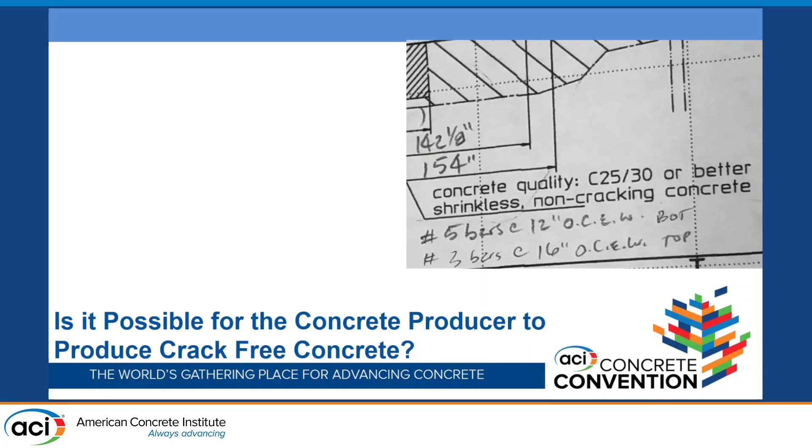So, is a concrete producer responsible for cracking? Is it possible to produce concrete without cracking?

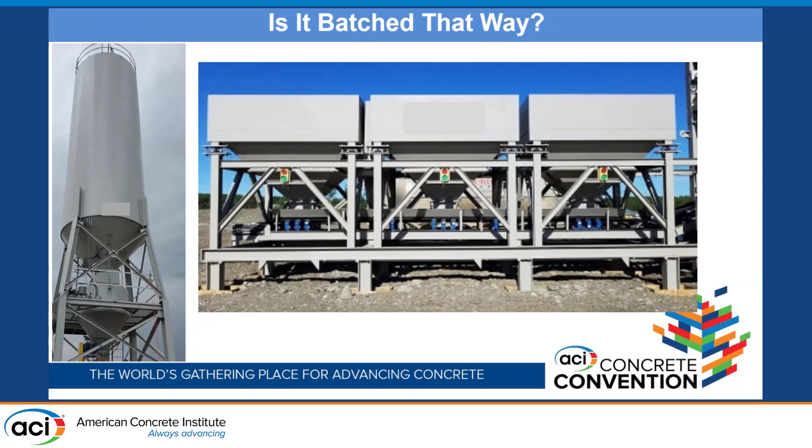So here's a ready-mix plant. We've all seen these before, right? In these plants, we usually label the bins. So we've got 57 limestone, natural sand, and of course the crack bin. And then over here we've got our cement and cracks in that silo.

So do you think we actually put cracks in the concrete before it leaves the plant? No. Do we have the potential of making concrete that can crack at the plant? Sure.

So if we put in more sand to help it pump, how is that going to affect the concrete? Water demand, increased paste, all those kinds of things. If we put in more rock to help reduce cracking, what's going to happen? It's not going to pump, it's not going to finish well, all those kinds of things. So we have to find that balance. Same thing with the cement. If you put too much in, it's going to crack. Not enough, it's going to crack.

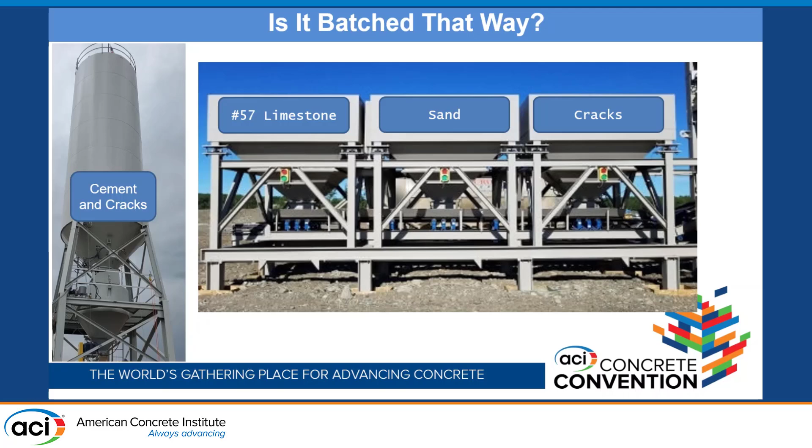So in a broad perspective, cracks form in concrete due to one or more of the following: stress, not controlled by me; subgrade issues, not controlled by me; weather conditions, not controlled by me.

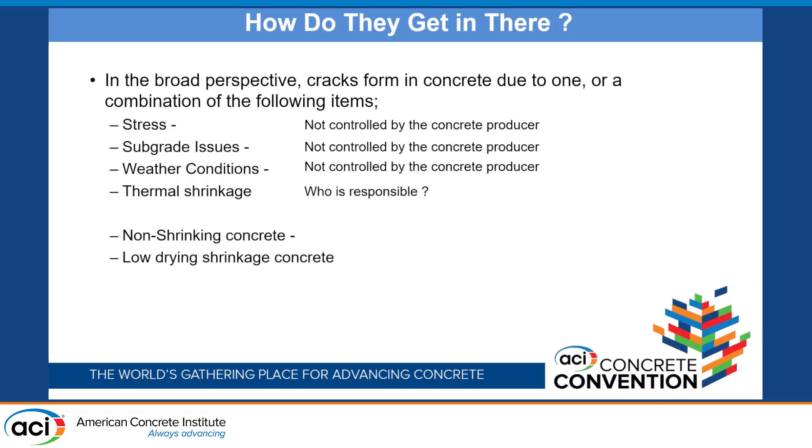Thermal cracking - I was in ACI 207 this morning, I'm a member of Mass Concrete, and I don't want to talk about thermal cracking ever again, but it's part of the committee meeting up there. We just talked about it in 301 not long ago. So we're not going to get into thermal today.

So non-shrink concrete is really not possible with normal Portland cement. Now we can get into Type K and that kind of stuff, that's a whole other discussion. But for ordinary Portland cement concrete, you're not going to produce crack-free, non-shrink concrete.

Can we produce low drying shrinkage? Sure. But how low is low enough? You give me some shrinkage number - is that going to guarantee that you're not going to have cracking? What is that magic number?

And are all cracks caused by shrinkage? Pretty much no, right?

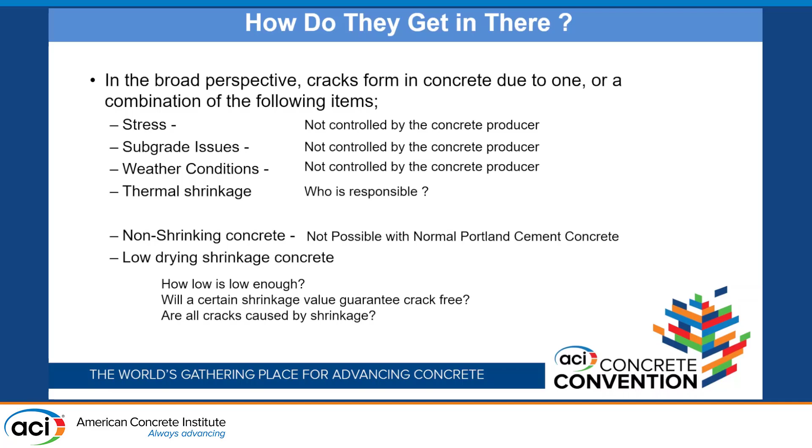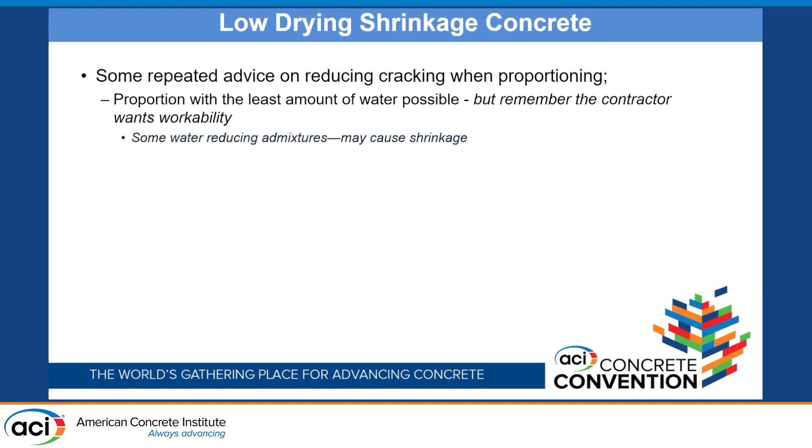So some repeated advice you'll always see, whether it's in Design and Control of Concrete Mixtures or any other references out there: proportion with the least amount of water possible. But remember, the contractor wants workability, right? So you can add high-range water reducers, all that kind of stuff. But some water reducers actually cause shrinkage, and we'll get into that later if you want. Go bug your admix supplier if you want to dig into that.

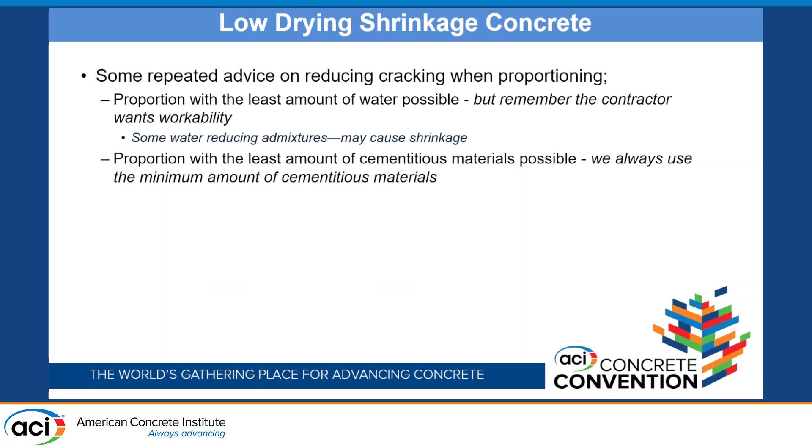Proportion the mix with the least amount of cementitious material possible. Now, being a good ready-mix producer, I'm not going to put any more cement in there than I have to - what's the point of that? So I want to make sure I'm going to get the right amount of strength guaranteed to my customer without over-cementing it.

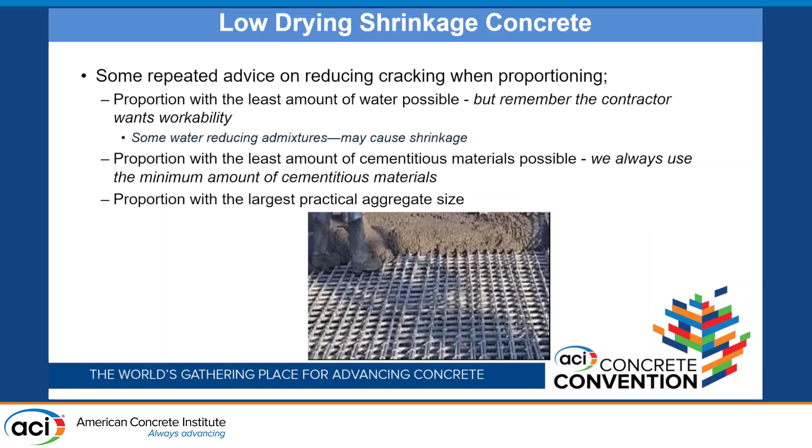So who's responsible to determine the proportions of the concrete mixture?

We can produce low shrinkage concrete if you have enough money. Pay me enough, I'll give you a good mix, but it's going to cost you. Shrinkage is affected by available concrete mixtures and ingredients, so there are rocks that shrink more than others, and more sand can contribute to that too.

If you bring in materials from farther away, it runs up costs. Most projects don't have the budget to bring in concrete mixture ingredients from out of the area. I'm not going to rail in granite from South Dakota to Texas unless you're willing to pay for it. That's a whole different story.

Shrinkage additives may reduce drying shrinkage, but they're not cheap and may cause other issues. One is that whenever you use a lot of shrinkage reducing products, you'll lose strength. So what do you do to combat that? Put more cement in. But then what happens? It shrinks more. So you're in this circular pattern of problems—something to remember when dealing with that.

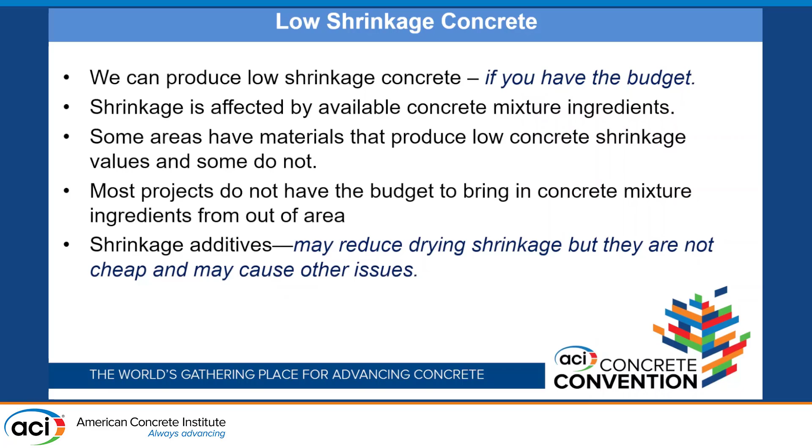This happens to be from one of the projects I'm working on right now. It says maximum cement contents are determined from the maximum water cement ratios. The maximum water contents given in the concrete property tables are intended to minimize drying shrinkage and heat of hydration. So if I design a mix that meets all these criteria, is it going to minimize cracking? Are you going to guarantee low shrinkage just because I produced it that way?

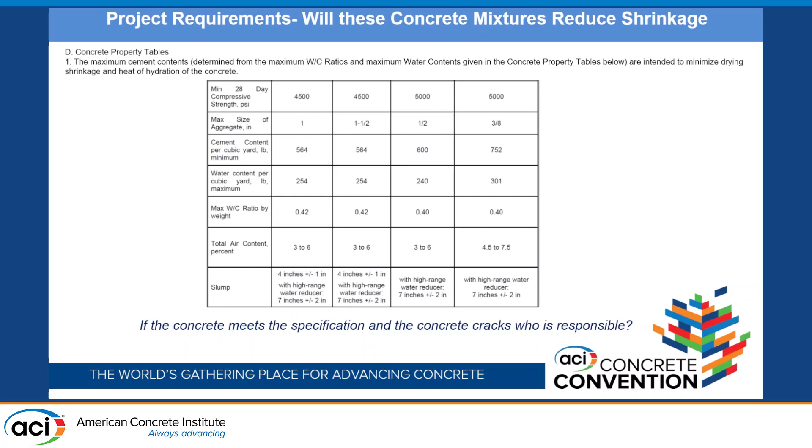So if I do it and it still cracks, who's responsible—me or the engineer? Good question, right?

Well, this is another part of the spec. Maximum concrete shrinkage for specimens cast in the laboratory from the batch will be measured at 21 and 28 days at 0.036 and 0.042 respectively. But also, maximum concrete shrinkage for specimens cast in the field shall not exceed the trial batch maximum drying shrinkage by more than 25%. That means I cannot have more than 0.05 in the field.

So how do you read it? Is that how everybody's reading it? ASTM C157, the shrinkage spec, says field cast specimens can show up to twice as much drying shrinkage as laboratory cast specimens. So if I have to keep it below 0.05 in the field, what does my lab concrete have to be? 0.025, right?

So then I'm getting more and more things that are costing more and more money. You get somebody giving you concrete that may or may not shrink still, may or may not crack still.

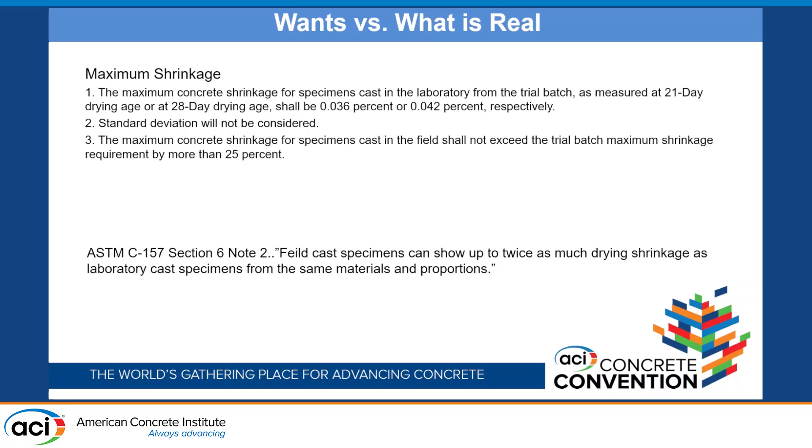So what is real? This is a particular set of materials that I have in Texas. I ran different water cement ratios versus shrinkage, and just as everyone suspects, the more paste that you have in it, the more shrinkage you're going to have. That's not a shock to anybody.

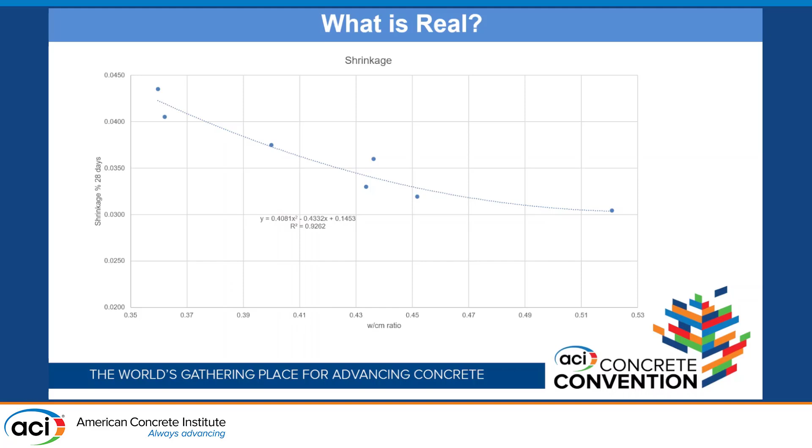So we want to find ways that we can reduce the amount of shrinkage but have enough cement content in the mix to make strength. It's one of those competing factors against each other.

So here's another one: it says concrete shrinkage limit shall be as follows. All concrete designated as low shrinkage shall utilize concrete with shrinkage of less than 0.02% at 28 days. Over here, what I just showed you is that probably the lowest I can get down to is about 0.03. So if somebody says they want 0.02, is that going to happen? Not to say it's impossible, but it's difficult with these materials without adding a bunch of extra cost.

So all the concrete used for suspended slabs utilizes concrete with 0.035 at 28 days. We can do that, depending on how much strength that you need.

Now, if you're worried about these slabs, that it's going to be on a suspended slab that you're going to strip early, what's going to happen? You're going to put more cement in there to strip early. So are you going to make the 0.035 then? Maybe not. So what's more important to you at that point?

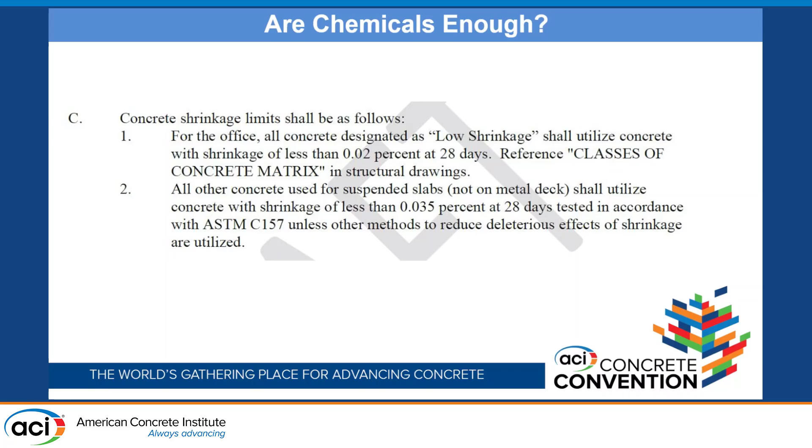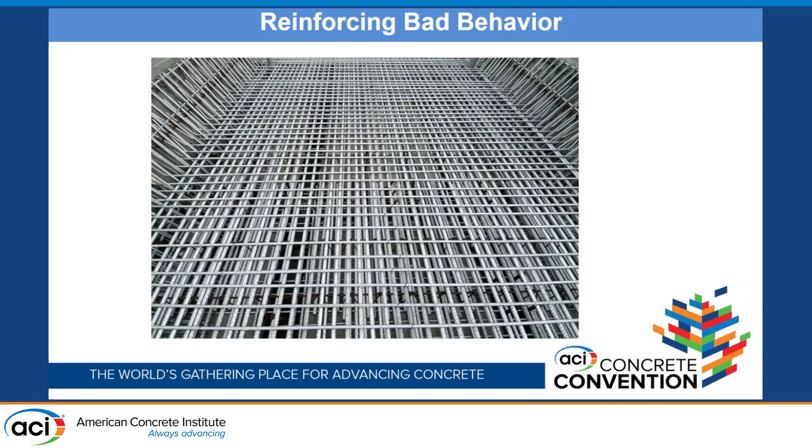So what happens on the job? My truck goes to the job. That's my PowerPoint skills, everybody.

This is an automated slump control system that we have in our trucks. You can tell as he leaves the yard—I don't know where the laser is on this, but anyway, you can tell that he's right at slump when he leaves the yard.

He shows up on the job site. Guess what? A bunch of water's added on the job site. So what do you think is going to happen to that concrete, especially since it was supposed to be a 6 and they poured out a 9? What do you think is going to happen to that concrete?

It's going to crack. I guarantee you it will crack. We know this, yet we do it all the time, right? So you've got to decide what's more important at the time.

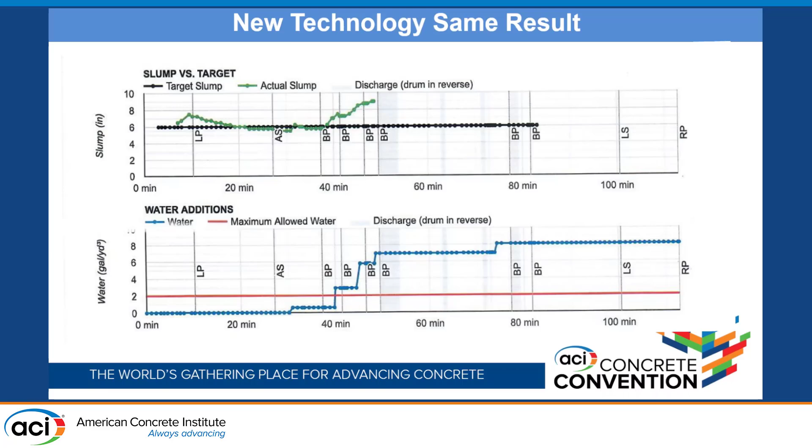So how does weather play into it? We've all seen this little graph, right? Someone familiar with this pretty little graph? Essentially, it's a way to predict whether or not you're going to have plastic shrinkage cracking. It's debatable how accurate it is. I think it's pretty darn good, but some people disagree with it.

I will tell you, being in Texas, that every day there's potential for plastic shrinkage cracking. High winds, low humidity, high temperatures, you will get plastic shrinkage cracking. And it looks like that. Is the owner going to be happy with that? No. Is that cracking the responsibility of me? The responsibility of the contractor? The engineer? Who's responsible for that?

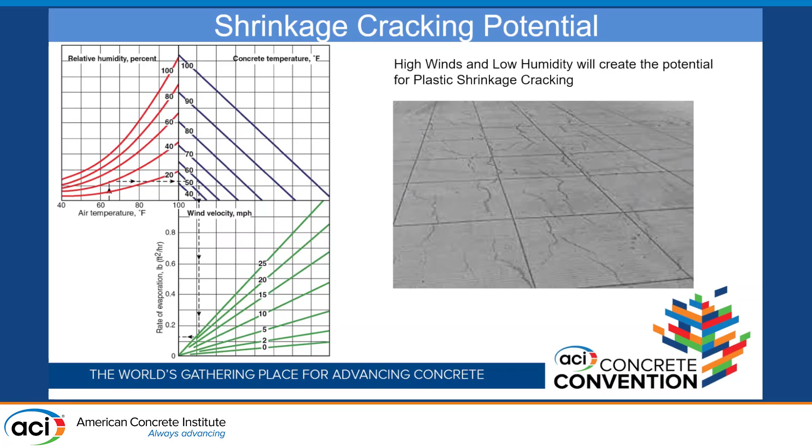So what's the producer supposed to do? Remember the repeated advice? Proportion with the least amount of water possible. I will do that. I will make sure that there's no more water in that mixture than there has to be. But that may result in lower slumps than what you really want.

Proportion them with the least amount of cementitious material possible. I'm going to do that all the time. I don't like giving away cement. Although I'll tell you, I have cement responsibilities and I have ready mix responsibilities, so I have this constant urge to make sure my cement guys are taken care of as well.

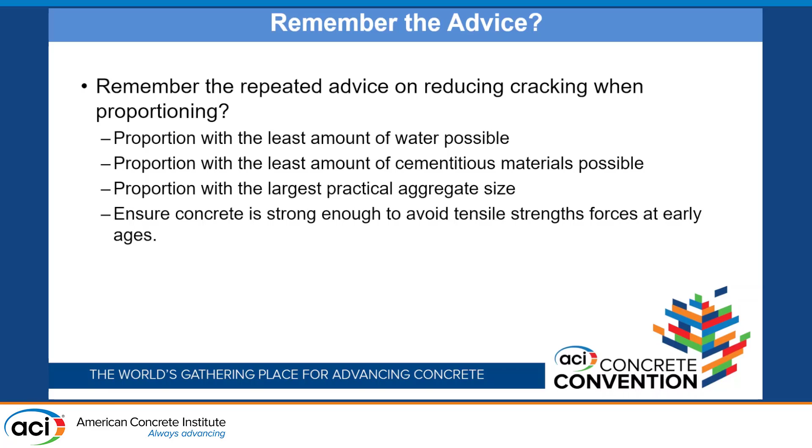So the fight for economy, quality, and design, just like the triangle we just talked about, right, cause all these things to be slighted. So poor design requirements will cause the concrete to crack. Specification requirements can increase the cost of the concrete mixture. Poor application procedures will cause the concrete to crack. And poor quality of mixtures or applications will cause the concrete to crack. There's a lot of things involved in it.

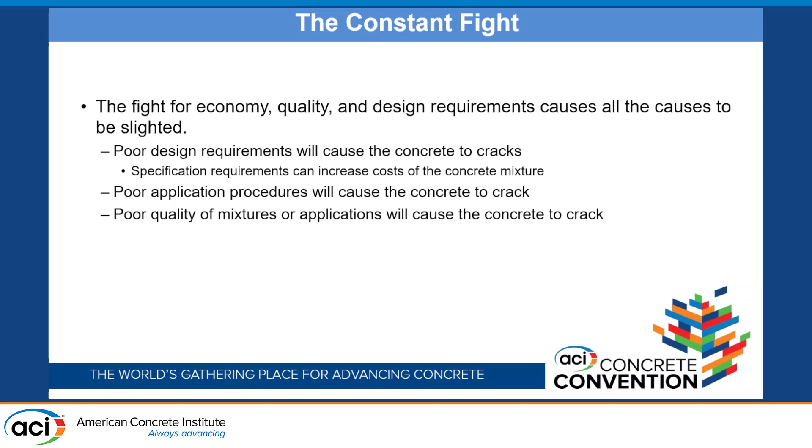So cracking has a very good potential a lot of times. Adding chemicals, high ranges, may actually increase shrinkage a little bit. Shrinkage reducers will reduce strength or increase cementitious content. Expansive cements will increase form costs and require more labor to produce, all those kinds of good things. Proprietary additives can be a challenge to produce. I won't go into all the brands, but they all require special things.

And fibers can increase water demand due to perceived workability loss. So if you increase water demand, what happens? More shrinkage. So if the fibers aren't able to withstand that shrinkage, you're still going to get cracking. That's all going to cost you money, right?

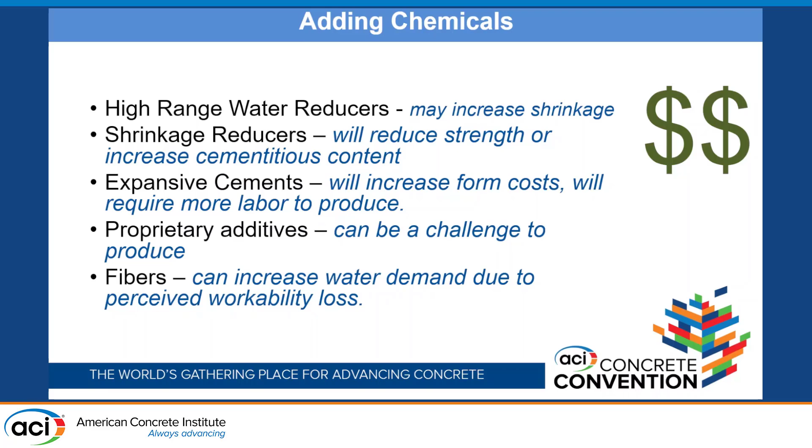So the next wave of things, and don't get me wrong, I want to make this statement very clear: I am not against measuring the GWP, making sure that we're more carbon sensitive, all those kinds of things. I'm not against that at all. But I will say we have to remember this: if we reduce GWP, what's the best way to reduce GWP in a concrete mixture? Reduce cement content, right? So we reduce cement content, what do you have to replace it with to make strength?

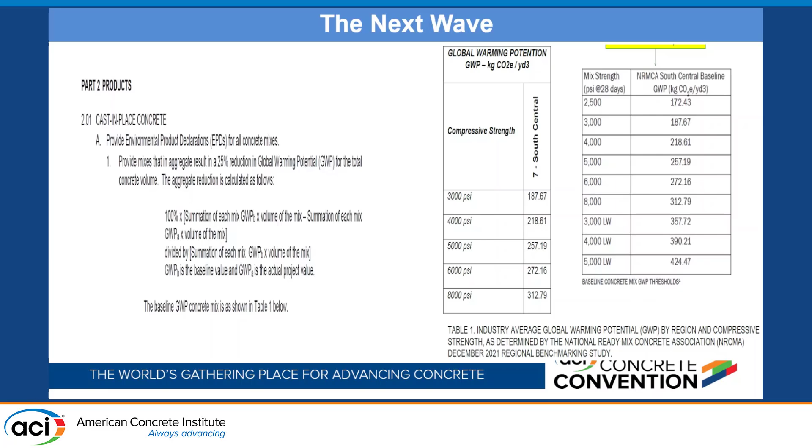Ash, slag, those kind of things. What happens to early age strength when you have higher ash content? Say you're running 40% ash, what's going to happen to your early age strength? Tensile strength especially, it's going to be very low. So what's going to happen to the concrete? It's going to crack, right? So we have to keep that in mind as we move forward.

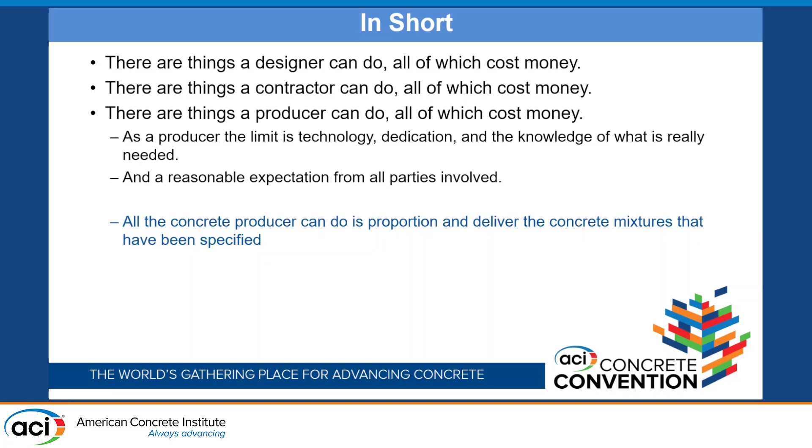So in short, there are things a designer can do, all of which cost money. There are things a contractor can do, all of which cost money. There are things a producer can do, all of which cost money. So the limit is the technology, dedication, and knowledge that we really need, and a reasonable expectation of everyone that's involved. That's really what it comes to. All we can do is proportion and deliver concrete mixtures that have been specified and agreed to. Pretty simple, right?